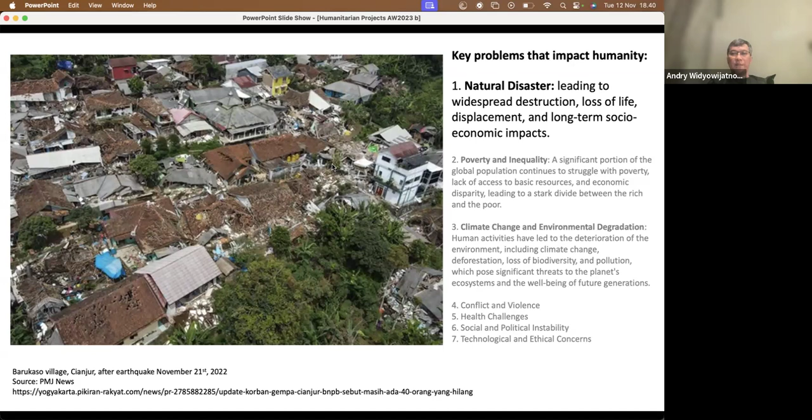There are seven key problems that impact humanity, but I would like to highlight only three of them, which relate to my professional or volunteering projects that I will present today. The second key problem that impacts humanity is poverty and inequality.

A significant portion of the global population continues to struggle with poverty, lack of access to basic resources, and economic disparity, leading to a stark divide between the rich and the poor. This picture shows how poverty compels residents to construct buildings that are not up to standard, such as non-confined masonry, which is vulnerable to earthquake hazard as seen in Cianjur.

This is one of the buildings that I've seen in Cianjur collapse because of the earthquake, which was not a very big earthquake. A 5.6 is considered not a very heavy earthquake. But the massive destruction in Cianjur was because of poverty on one side, and people tend to build out of masonry construction, despite it not being up to the standard for earthquakes.

Another key problem that impacts humanity is climate change and environmental degradation. Human activities have led to the deterioration of the environment, including climate change, deforestation, loss of biodiversity, and pollution, which pose significant threats to the planet's ecosystem and the well-being of future generations.

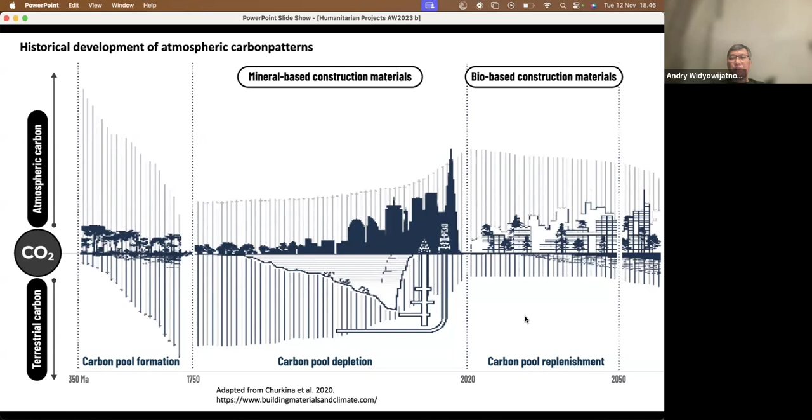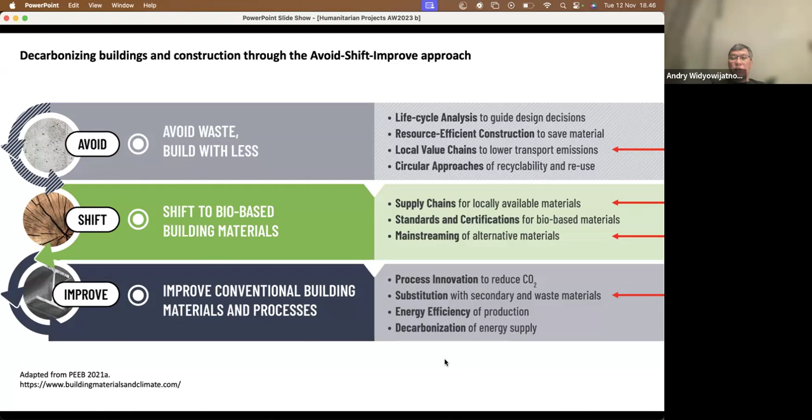Now I would like to go into the second section, which is about bamboo and timber. Recent advances in timber building materials technology offer the potential to replace carbon-intensive steel and concrete structures in some urban areas with mass timber. This provides the double benefit of reduced production emission and long-term carbon storage in the building compared to mineral-based materials. Substituting conventional materials with mass timber could reduce global emission 14 to 31%.

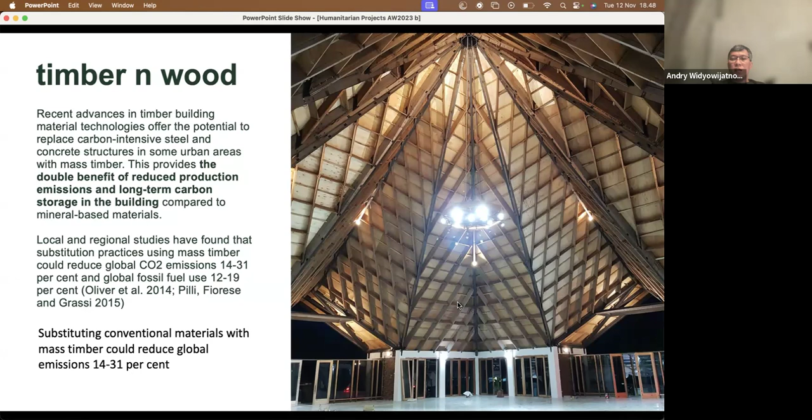This is a very huge impact if we can do this for our environment. We can improve our environment a lot if we use mass timber as a replacement for high-emission materials like steel and concrete.

And on the other side, bamboo is considered to be the front runner for driving afforestation practice to mitigate climate change. Global studies of the annual carbon sequestration capacities of bamboo range from 5 to 24 tons of carbon per hectare on the lower end. This is 1.46 times the sequestration capacity of forest and 1.33 times that of tropical rainforest.

And unlike the carbon sequestration losses associated with timber logging, selective bamboo harvesting may be less ecologically damaging to the forest, and productive species can yield between 150 to 296 tons per hectare of forest plantation land.

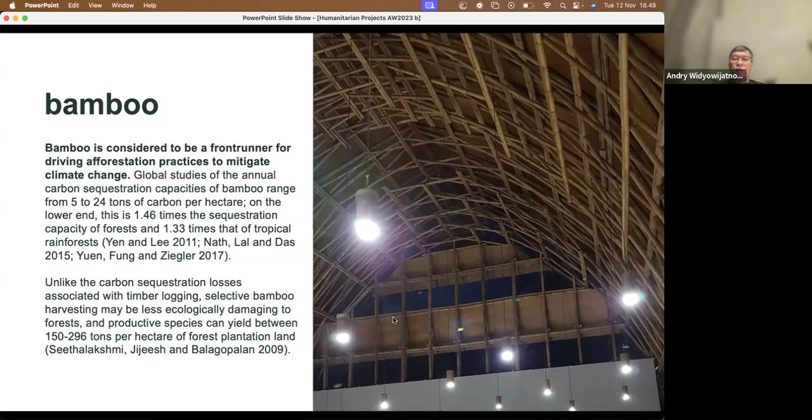And this is how we need to change the way we think of steel and also concrete. So if we can do it with bamboo, then it would be a lot of impact to our environment.

So in section 3, I would like to go on with the architecture for humanity, which I divided into some structures that I've built after the earthquake. So first is the temporary shelter and the mosque. As architects, we need also to think about the very unfortunate people, for example, those affected by the earthquake.

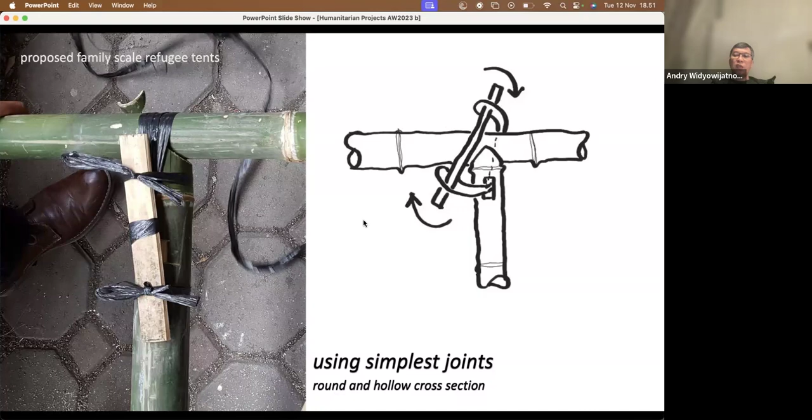And prior to going to Lombok after the earthquake in 2018, my students and I conducted a workshop in our university, and we made the prototype of this temporary family shelter. So we use 11 pieces of bamboo with the same length, and then we use a kind of reciprocal frame configuration. This is widely known as the Da Vinci bridge configuration.

And after we make this kind of connection, everything can be done on the ground. It's very easy. Then we lift this up and push this one inward, and the next step is we have an A-frame like this, and then we tighten the crossing like this with the ropes. And then after that, we can cover this one with the tarpaulin.

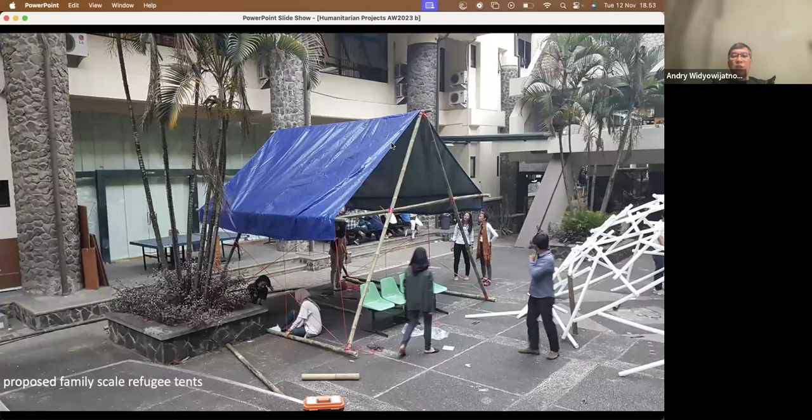So this is the process that we did with our students in the backyard of the campus, and we covered it with the available tarpaulin at that time. I would like to show you how the structure is very light. It can be lifted with only four men. Later on, you will see how easy this is to be lifted and moved to other places wherever it is needed. So it is quite strong enough also. Not very strong, but strong enough as a refugee shelter.

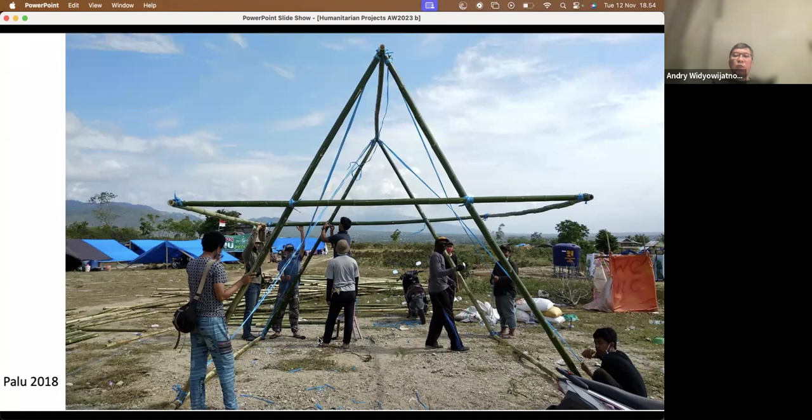And after the workshop, I sent my students to Palu, because previously Lombok was hit by the earthquake, and after a couple of months, the earthquake hit Palu, and the casualties were also very big there. So I sent the students to Palu to build this, to try to educate the people and to offer a more comfortable family shelter for the refugees. And this is the example.

And I've built this structure in Lombok also. I didn't use the common tarpaulin; I already made the measurements prior to building it, so it will fit with the A-frame. I even stayed in this shelter for 2 or 3 nights in Lombok. It doesn't provide the best comfort, but of course it's more comfortable compared to the shelters built by the people in Lombok by themselves.

So after the earthquake, which happened in late 2022, we built many bamboo shelters for the people there, because the need is very, very huge. And we were very lucky to be helped by the military.

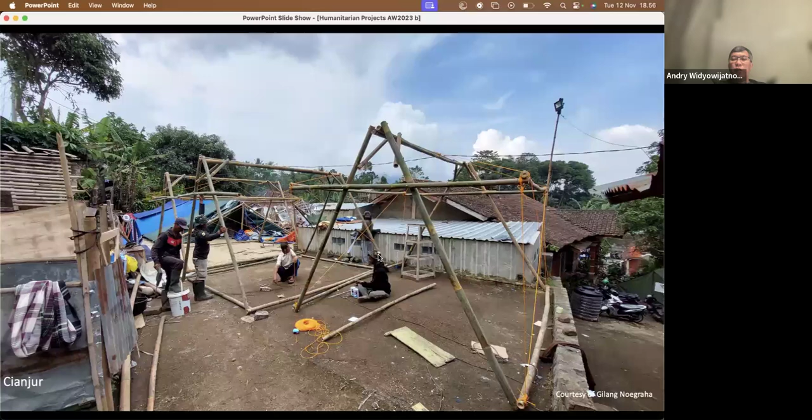Yeah, military. We teach them how to build the A-frame shelter, using a very simple connection like this. And then because of the discipline of the military, they can build in many places. The replication is very, very heavy there.

So we built in a certain location as a workshop for building this shelter, and after we finish, we move it to wherever it is needed. So you can see that this can be lifted with only four people after it's finished. You see here we built this differently from the previous one you saw in Lombok.

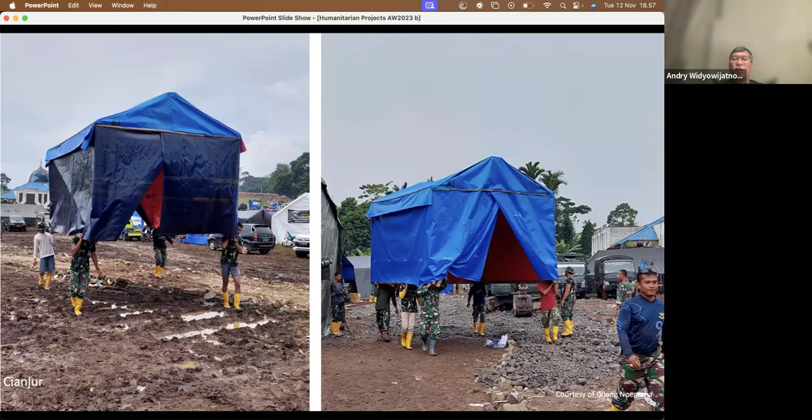In here we use the available tarpaulin, in which one tarpaulin is used to cover the wall, and the other tarpaulins are used for roofing. So basically, this is used without pre-cut tarpaulins, just using the available tarpaulin that is already in the place.

And in here you also don't see the ventilation. Later on, I will show you our development to make the ventilation in this tent. But you can see here we built in many places, and then we sent them to the people in need. And this is the compound of the refugees using our tent.

We work with the NGO there, called Rumah Amal Salman, and we built more than 140 small shelters, 3 to 4 square meters, with a height of 2.6 meters. And we even built 3 big shelters, 5 to 5.7 meters, with a height of 4 meters. This was needed mostly to replace the temporary mosque in Cianjur.

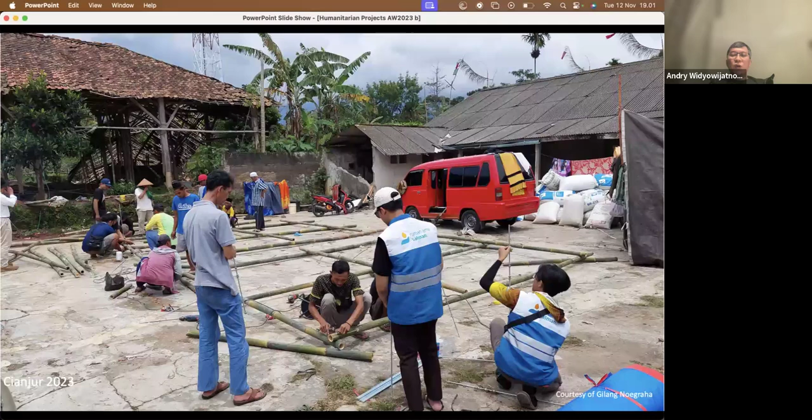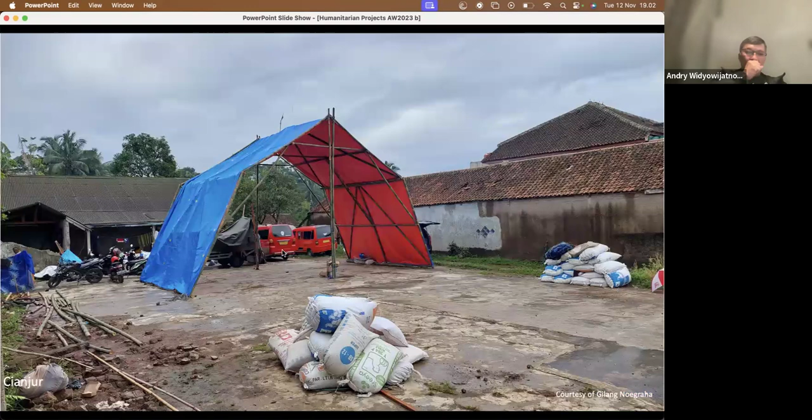So not only the small family shelters, we also built big shelters for the mosque, the general kitchen, classes, and other purposes. This is the example of the big shelter that we built in Cianjur.

We can solve the problem with the span. We can solve the problem with rigidity against the earthquake. But the problem with a big structure like this is the wind. Because it's very light and basically closed, it's really easy to be blown away by the wind. Therefore, we need to reduce the height of the building.

So in the end, we needed to cut and reduce the height. So we built a much smaller shelter. However, it's still big enough for the community to stay there after the earthquake.

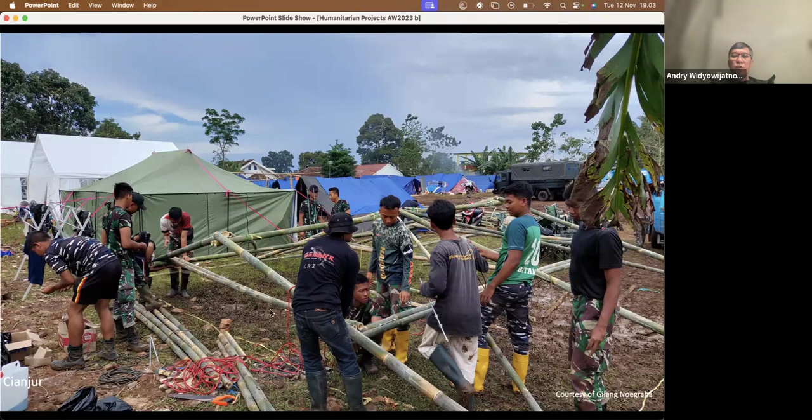And this is another example also in Cianjur, with the help of the army. We built many big shelters, and because of learning from previous experience, which was quite easy to be blown away by the wind, we need to use more reliable joinery in this case. So we use threaded rods or bolted joints for this construction.

Although we also make it very simple, everything is done prefabricated, and after that we teach them how to connect these two together, so we can build the mosque in here. So this is basically quite a big space for the mosque, because the mosque also collapsed because of the earthquake.

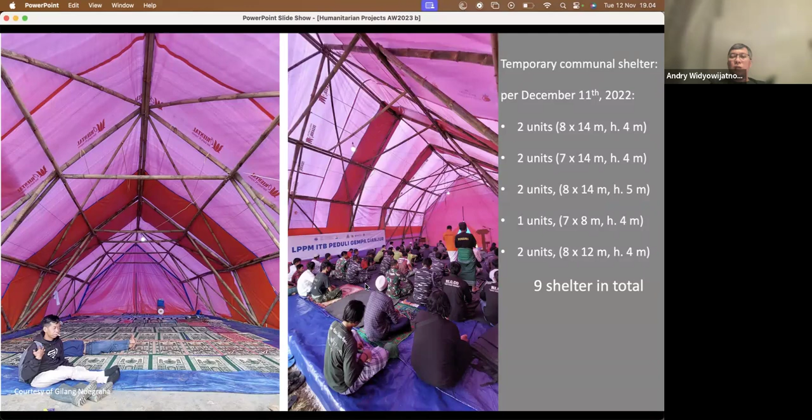So this is after the Friday praying in the mosque. So up to 11th of December 2022, we built nine big communal shelters like this in total, with a very big span, like 8 to 14 meters, with the height of 4 meters. So this is the things that we can reach, we can build in there.

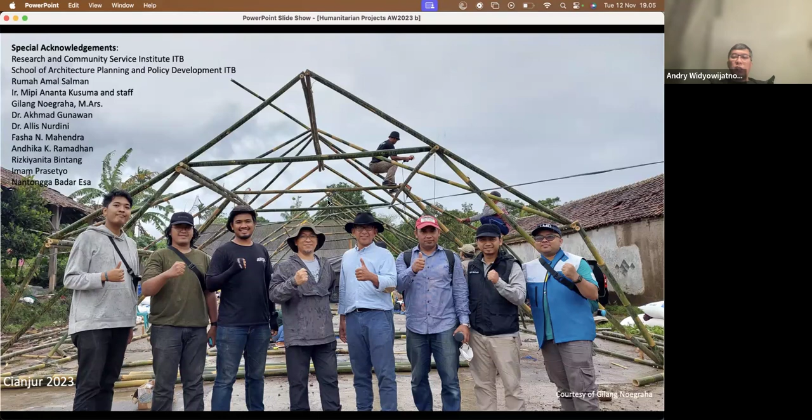So this is actually work of many stakeholders, and some of them are also my students in ITB. And going back again, from the earthquake in 2018 in Lombok, this is probably the prototype of the smaller scale of community shelter.

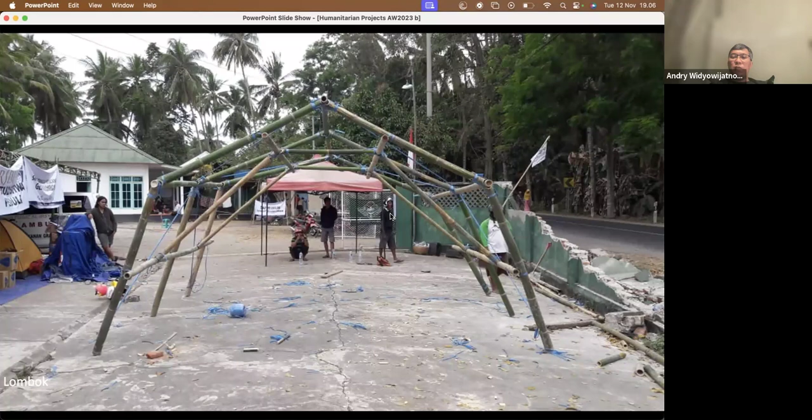With the help of my student at that time, Gilang Noegraha, I sent him to Lombok, and then he built the shelter in Lombok with the community, teach them how to build it, so they know how to build it with the simplest connection that I've already taught to Gilang before. And yeah, this is one of the shelters that has been built in Lombok.

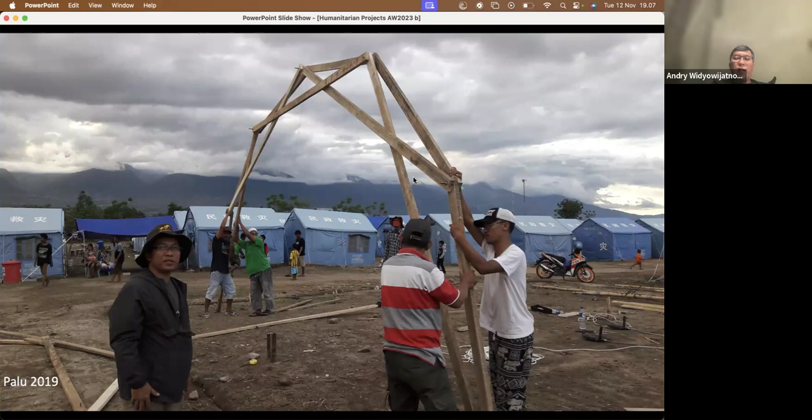And it's really useful actually. But the problem is the very big winds, because it's flat and exposed, and there is no big tree in the surrounding area, so it really had a problem with the big wind, and the quality of the bamboo is also not very good, and it collapsed because of the wind. And then I needed to rebuild again.

You see that this is another refugee shelter. People rarely stay inside the shelter during the day because it's very, very hot. They prefer to stay inside the big shelter that we built with the bamboo. However, it collapsed because of the wind, and also the kids were climbing the structure.

So we needed to build a more sturdy structure, and we changed it into timber construction, since timber is much easier to find in Palu with a better quality. So we changed the idea from bamboo into timber, and this is the frame that we built. Everything was done on the ground, and after we finished the frame, we erected the frames one by one. I even needed to help them to make sure that the structure is stiff enough.

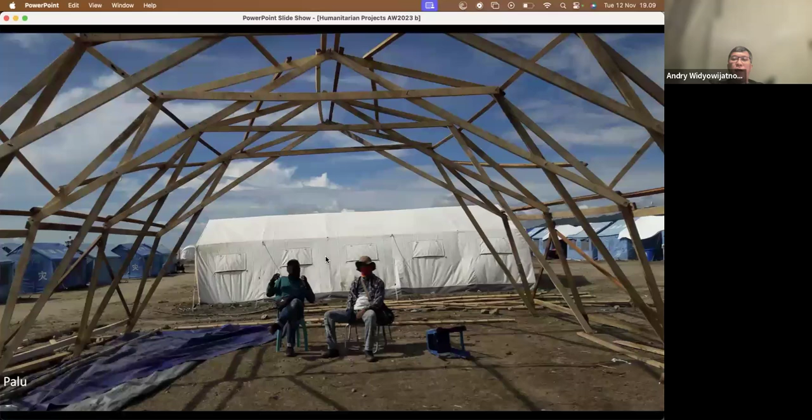And this also became the biggest structure in Petobo at that time. You can compare this one with another tent here. Afterward we covered this one with tarpaulin.

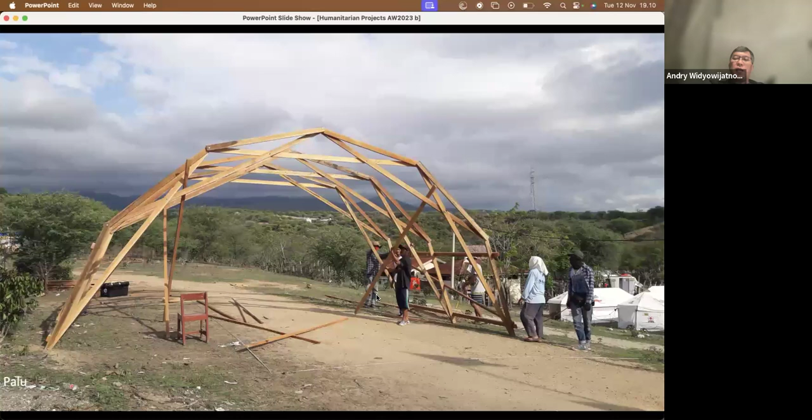And after we finished the first shelter, I left four of my students to build another in Palu, but in a different refugee area. So they know how to build it, with the help of two more workers in Palu. They built the second structure, and they could finish from the start in less than 5 hours. So in less than 5 hours, they already reached this kind of structure.

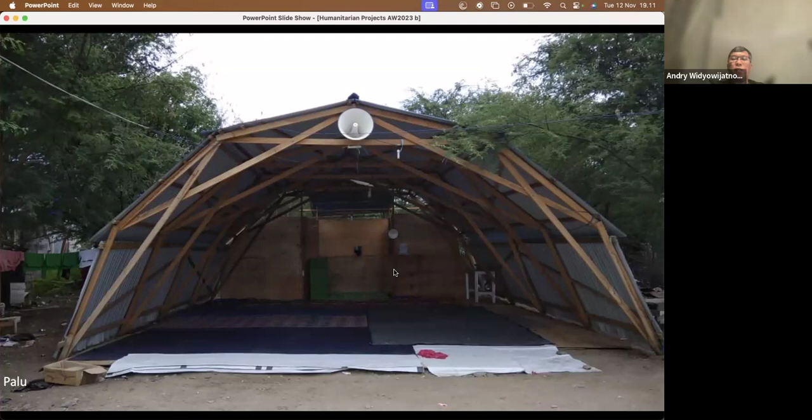And in this case, we covered this one with corrugated metal sheet because we expected a longer lifespan of the structure for the people to use this building. So this is very important. Medical treatment also happened inside the structure. And then it was moved to other places and became the temporary mosque there.

So it's really useful for the people because at the time it was also the biggest structure in the area that could be used. So there are many programs happening in this building.

And then after Lombok, Palu, the earthquake happened also in Mamuju, during COVID. So at that time I couldn't travel because everybody was locked down in the house.

Mamuju is about 9 hours from Palu. I still have volunteers that previously helped my students build this frame shelter, and I asked them to help me build four of the shelters in Mamuju. They agreed to do that, and everything was prepared in Palu.

They pre-cut the timber in Palu, and after that they transported the timber to Mamuju and erected it there. They built it in four places in Mamuju.

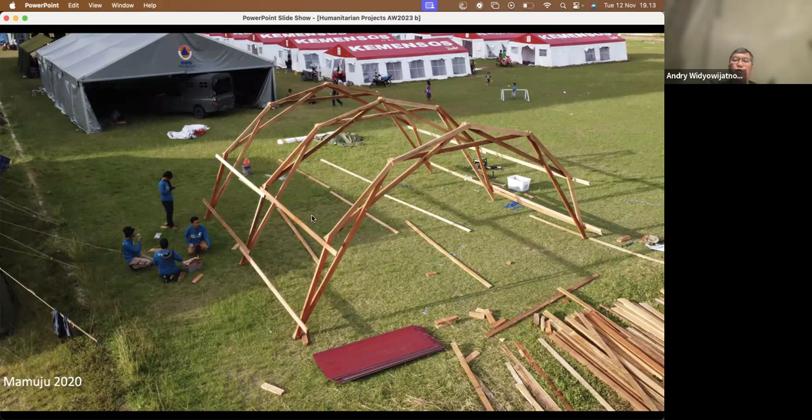After the reconstruction was finished, this was used as a kindergarten in Tapalang in Mamuju. So what was previously intended to be a non-permanent structure became a permanent structure. And this is another shelter which was built in Mamuju in 2020 by our volunteers at that time.

Using the same principles, after the earthquake in Cianjur, one of the health centers in Cianjur was damaged quite severely. So we needed to build a temporary community health center, or puskesmas as we call it. And we built it with the same principles.

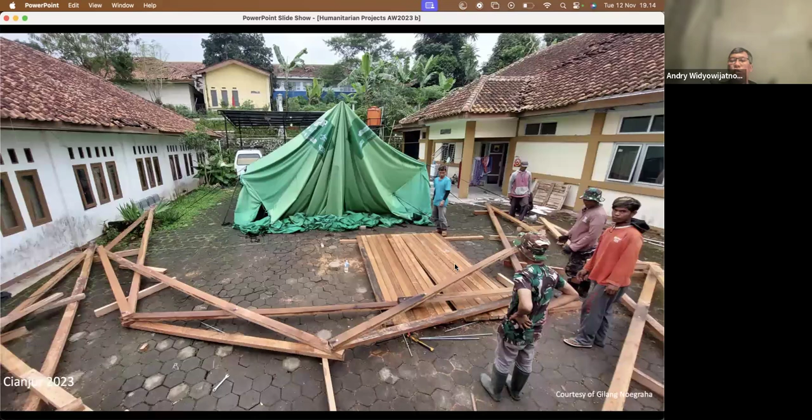We used timber, and we needed to build on this very narrow site. Using the same principle, though it's quite big, we could manage. Then we built the new Puskesmas here, and it has been used to replace the previous one. And I think one of the kids was born here during that time.

So this was the cooperation between Rumah Amal Salman Research and Community Service Institute in ITB and our School of Architecture, Planning and Policy Development. Some of my ex-students and also my students helped to build this one.

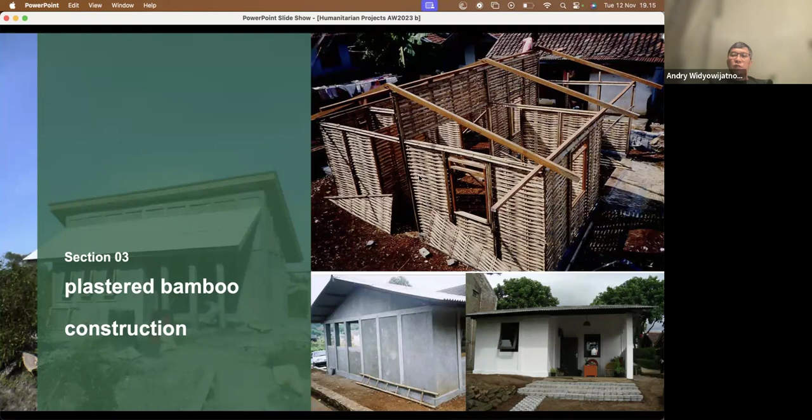Okay, then we move to the next section, where I would like to show you plastered bamboo construction. This is also one of the technologies intended to be used after earthquakes. So why plastered bamboo construction? Because almost no one in Indonesia wants to live in a bamboo house anymore. The problem is the image of the building, which is considered non-permanent.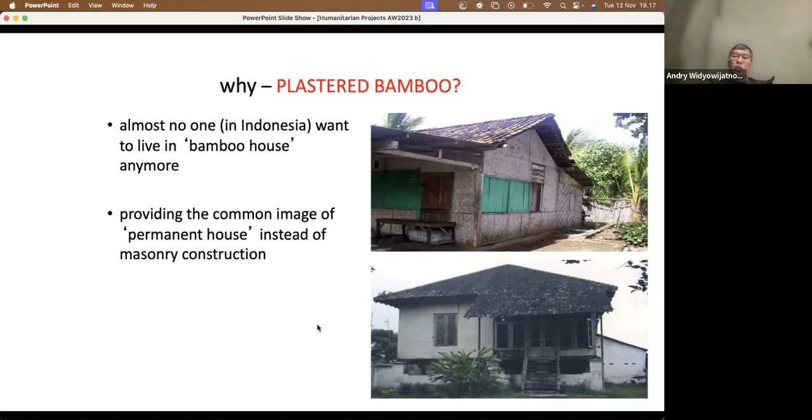The building looks like a masonry construction. However, it's actually made of a timber skeleton covered by woven bamboo and then plastered on the outside. So plastered bamboo construction is basically trying to provide the common image of a permanent house, but using bamboo and not using masonry or brick.

Another reason is we can use low quality bamboo, because in the end we can hide it. This is also an alternative bamboo preservation technique, protecting against rain and moisture and preventing the entry of fungi and beetles. Plastered bamboo construction also improves fire resistance and controls the interior thermal conditions.

In some cases that's very important, although most of the time, especially in tropical countries, it's probably better to have the same thermal condition between the outside and the inside, because in some places the outside is not very hot. The idea of plastered bamboo construction is also to provide housing while reducing waste.

With the common conventional method, after an earthquake there were refugees, and people tend to build emergency shelters, which become waste when they build the new house. Using plastered bamboo construction, we can make prefabricated bamboo panels, which can be used as bamboo emergency shelters in a safe location in the refugee area.

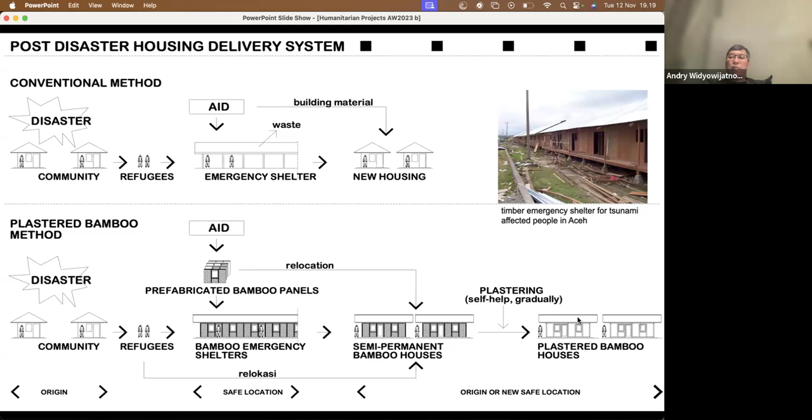Then after relocation, we can build a semi-permanent bamboo house using the same bamboo panels. And after plastering, it becomes a plastered bamboo house, which can be considered a permanent house. So the idea is making the prefabrication like this, then plastering, and then we have the common image of a permanent house.

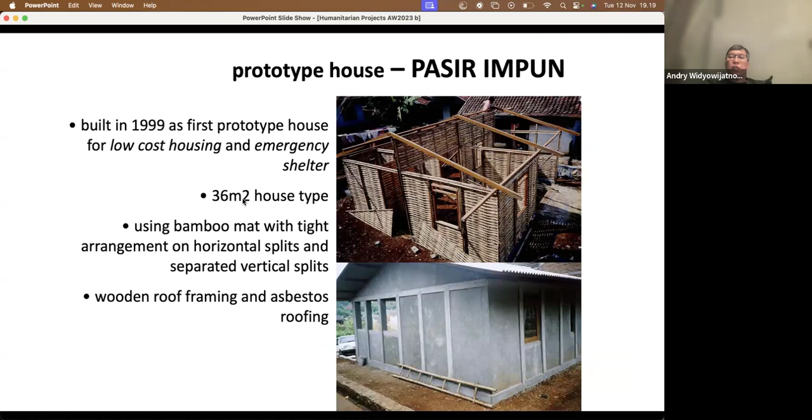This is the first prototype, built in 1999. Everything was done outside the site and then erected here. After that we did the plastering to have this 36 square meter permanent house. Everything was done here in the workshop.

Actually, the workshop has been done more than 300 kilometers away from the site, because at that time, because of many factors, it was built in Purworejo, in my hometown, including the wall frame and etc.

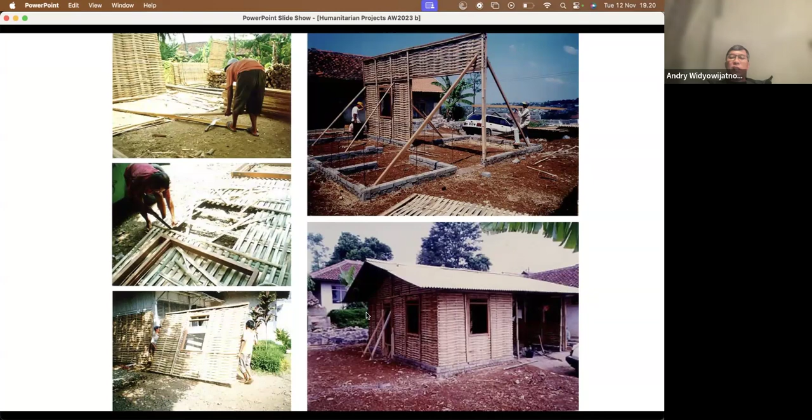And then I brought all of the modules to the site, and we erected them here in a day, so we can have like a day to erect all of the structure here, because using only very simple joinery, lacing joinery. And then it takes quite some time, probably a month, to plaster this one, because plastering is also new for the workers, so they need to learn first before they can do it fast. Yeah, so in the end, we have like

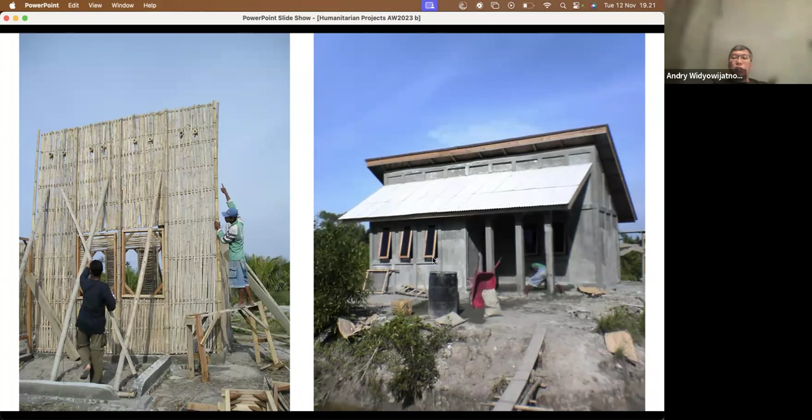construction. So this is another project. Oh yeah, this building is 1999, and up to date, the building is still there. So it's already like 25 years old. And this has been built in 2005. Yeah, it's 2005, and maybe last year, a student of mine took a look at this building, and it's still there. So already like 20 years old.

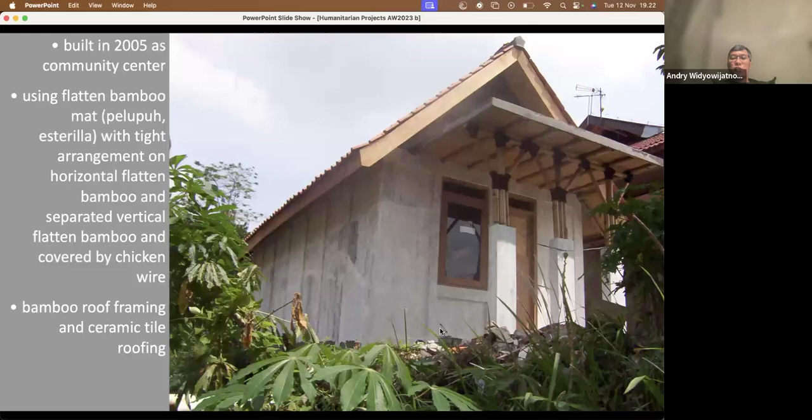However, it was demolished. Yeah, it was demolished because there was a project happening in this area. This is the last picture that I've shown. I use a different type of walling system. So in here, I use the flattened bamboo as a wall. And then I need to put the chicken wire to improve the quality, and also to improve the speed of the plastering process.

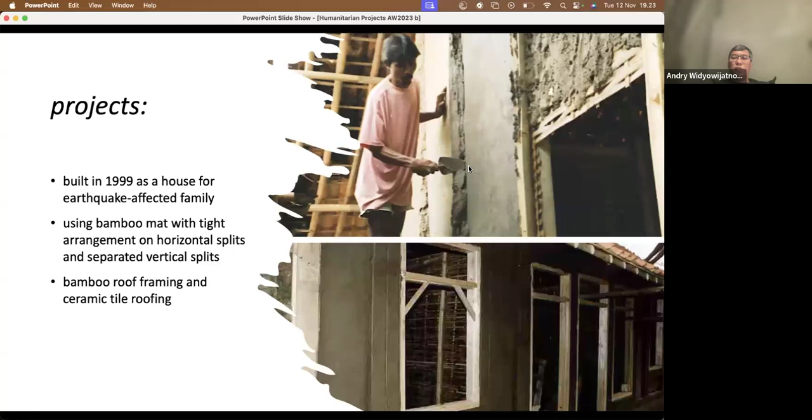Yeah, this is another project. It's also one of the first projects, built at the same time in 1999. This was built after the earthquake in Sukabumi, and my students collected the money from the donors, and then they built the house there. And in 2019, my student came back and saw the building is still there. So it's already like 20 years old, and it's still in good condition.

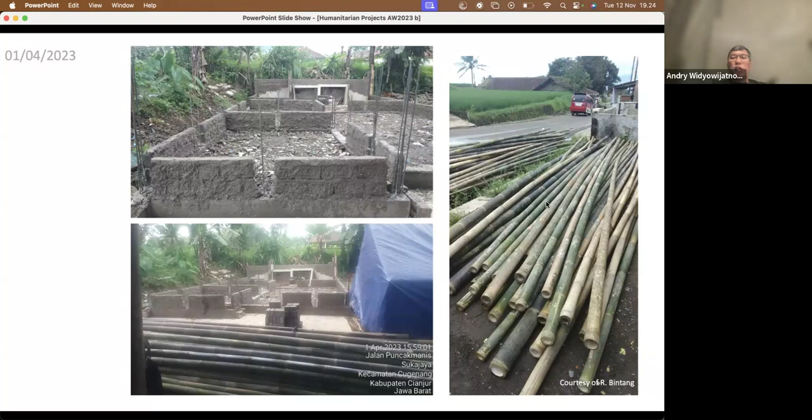And recently I built the new structure with my master students. And since the site is very small, it's very difficult to make a kind of prefabricated structure. Because it's going to be difficult to distribute the modules, distributing bamboo poles is much easier compared to the bamboo panels. So we built actually on site. We built all of the modules on site, and then we erected them one by one

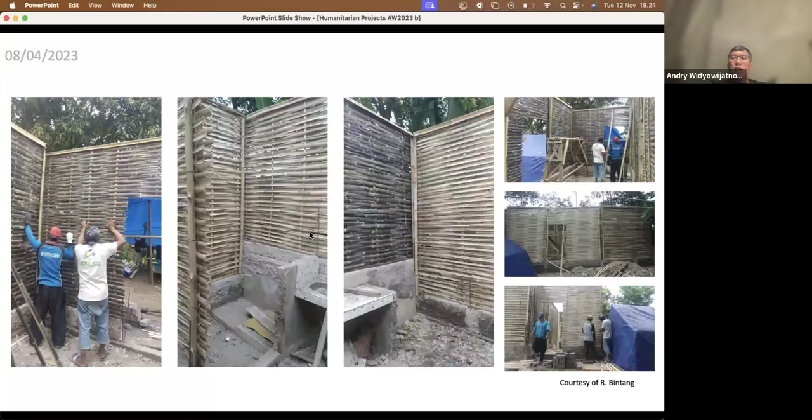like this. Yeah, and we use some black bamboo, because black bamboo has quite exotic skins. And with this black bamboo, we only plastered one side, and we expose the other side. So it will provide a very nice texture on the outside. So you can see this is after the finish of the structure.

You see that some of the walls we did not plaster. We want to keep it like this to show that actually the wall is not made out of brick, but the wall is actually made out of this woven bamboo. So yeah, this is the owner of the building, and this is my student. This is also a friend of mine that helped me to build this building.

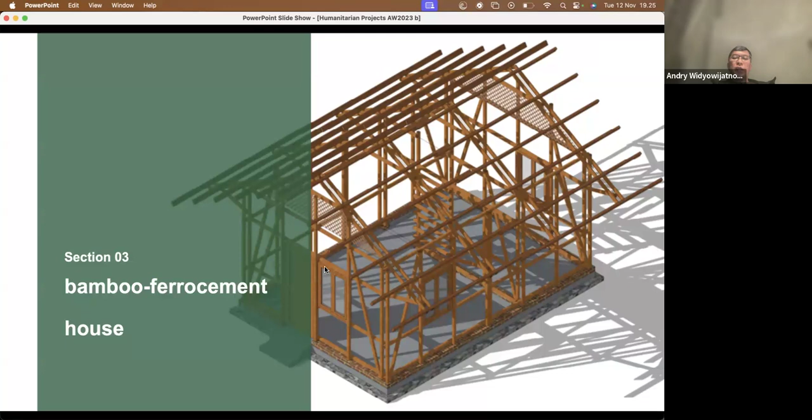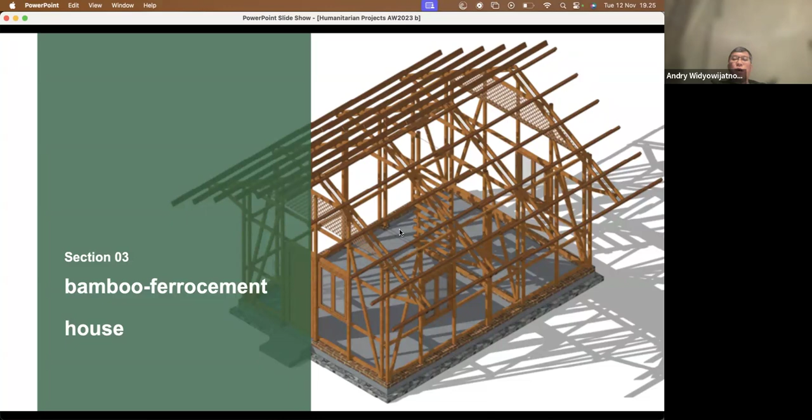And another structure that I've built for post-disaster reconstruction is this combination between bamboo and ferrocement. Ferrocement was widely used a very long time ago, but it's never been used recently. But I've seen that it can be combined together to make this, I call it a rumah bambu ferrocement, or bamboo ferrocement house. So the idea is very simple.

I have bamboo crossing each other, and put in the middle this chicken wire. I use the bolted joint to connect, and I make everything almost the same like this as wall modules, using a bolted joint and then connecting everything like this. Even you see that I have a door here, but the door is not open yet, so I let the bamboo go on.

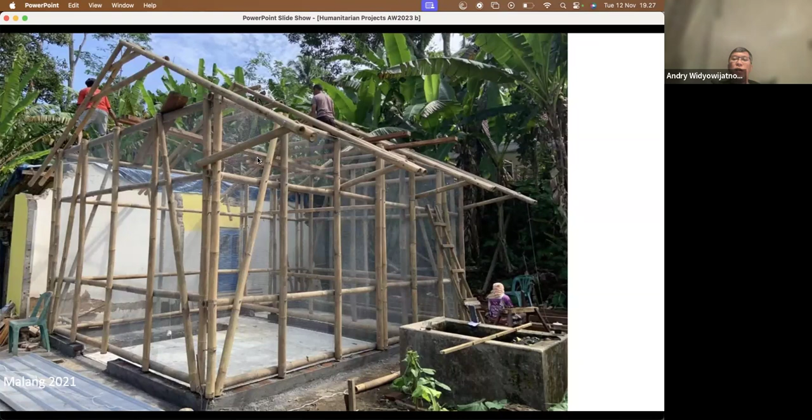This is important for transporting, and you see that the modules are like 1 meter each, like 4 meters by 3 meters, and another is 3 meters by 3 meters. So we're transporting everything like this, and then sending. Actually, it happened in East Java, and I made this one because I need to teach also the workers. I need to teach also my students how to do this. So everything has been done in Bandung.

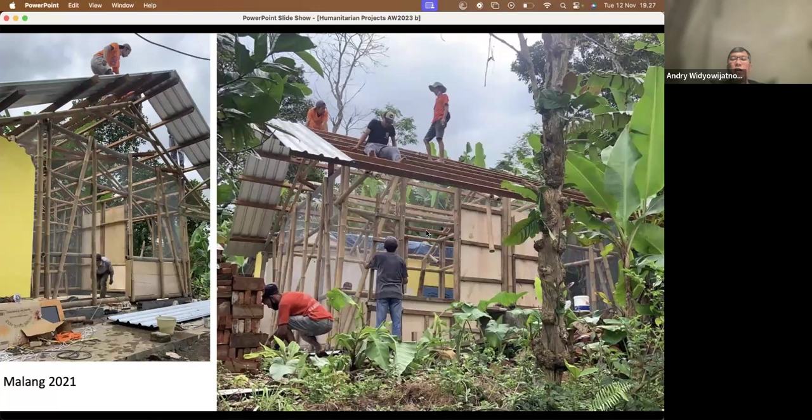So it's like maybe 400 kilometers away from the site of the workshop. So it's far away, but yeah, I see this one is the best way because of many considerations. And then the good thing is the people there are also very happy to help build this one. Although this is very new for them, they want to help one of their members in the village. So after that, we can finish the building here, and this is the owner of the building.

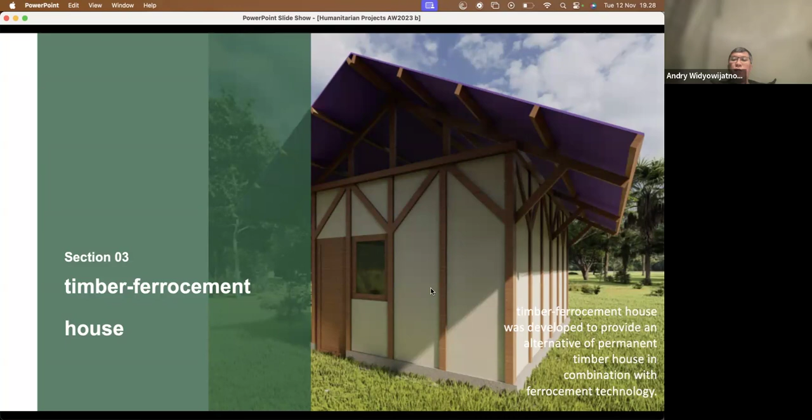She's very happy that we built her her new house. And then quite similar, but in different types of materiality, I built timber and ferrocement. The idea is the same, combining timber and also ferrocement, and in the middle, between the crossing timber, is this chicken wire. Yeah, and nailing.

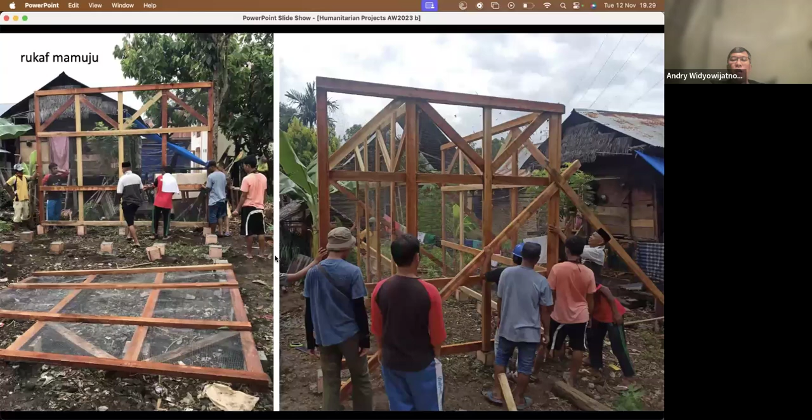Everything has been done very simple and very easy. And prior to erecting this one, we built the foundation, the simple foundation, and then we sent this one, and then we built it. We discussed also with the person who will use this building, and then with the help of the people there, we simply erected this kind of structure.

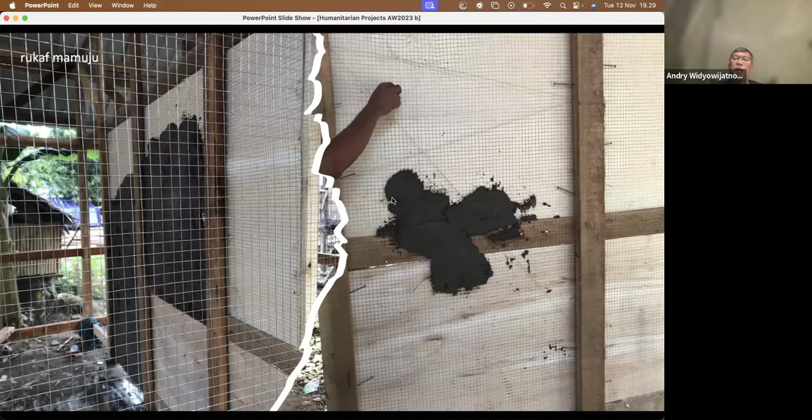And then after that, the building was erected. The frame is very simple and very easy, but then the problem or the challenge is how to apply the ferrocement. Yeah, because it means that we need to plaster this chicken wire. So it's a lot of work to do, but in the end they can manage to build it.

You can see that in one side we only see timber in one direction, and in the other side we see timber also in the other direction. So this is the way it works. You can see this is the final result of the building. And this is another community center in Cianjur after the earthquake.

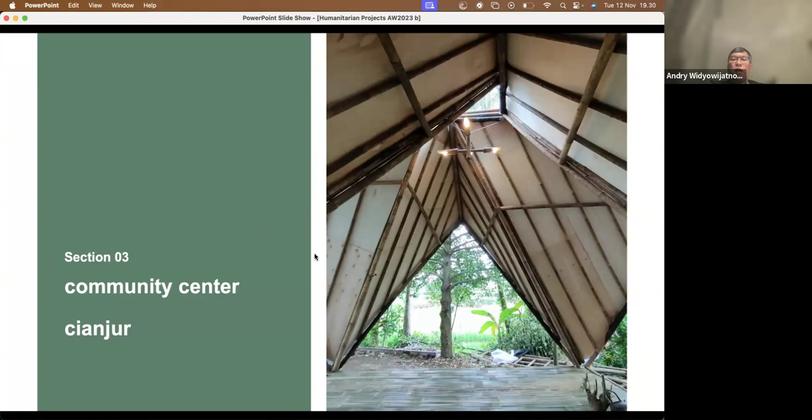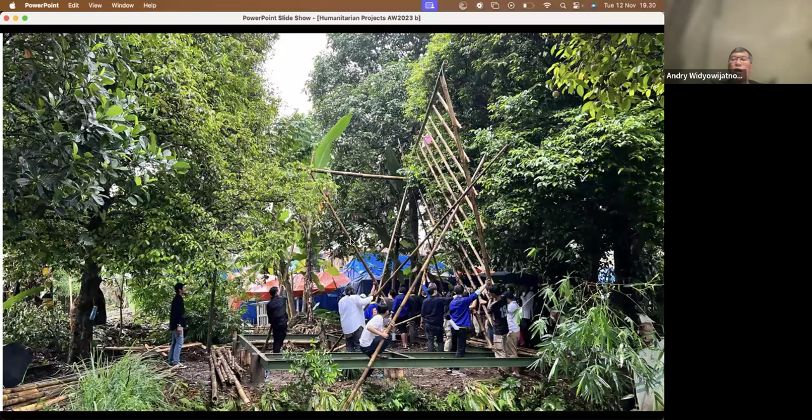I also have worked with students, and we collaborated with the University of Florida, ITB and University of Florida, made a workshop together, and we built this kind of gazebo for community shelter, because they don't have any open space. They don't have any building that is big enough for them to conduct like a program or anything. So we decided to build it in here.

First, the students need to work, and then after that we make a kind of jury, and then we choose one to be built, and this is the final result of the building.

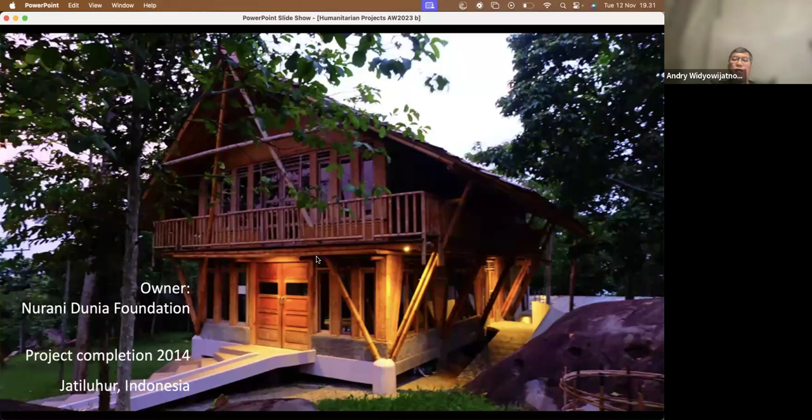This is another project of mine, community healthcare in Jatiluhur, using the planar frame. The owner is Nurani Dunia Foundation, and basically we also try to promote the use of bamboo in that area, because actually Jatiluhur has a lot of bamboo, but most of the buildings there have been built using masonry construction. So this is the structure that has been built.

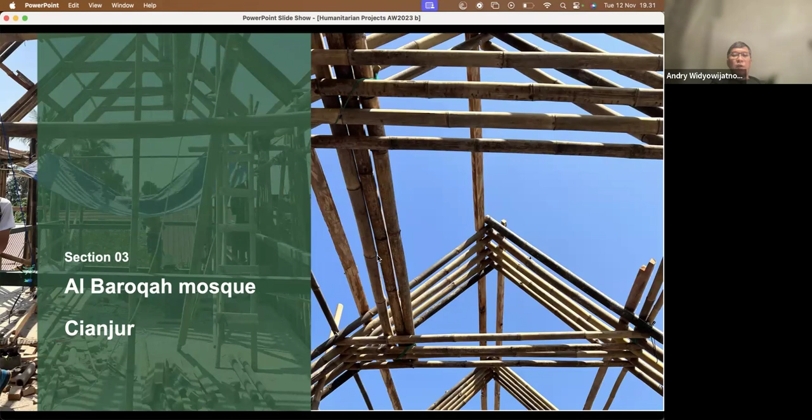This is another project after the earthquake in Cianjur. I've built a shelter, but then I've built two permanent structures. One of them is Al Baroqah Mosque in Cianjur. Yeah, this is not finished yet at that time, but actually it's already finished. But I haven't updated this presentation yet.

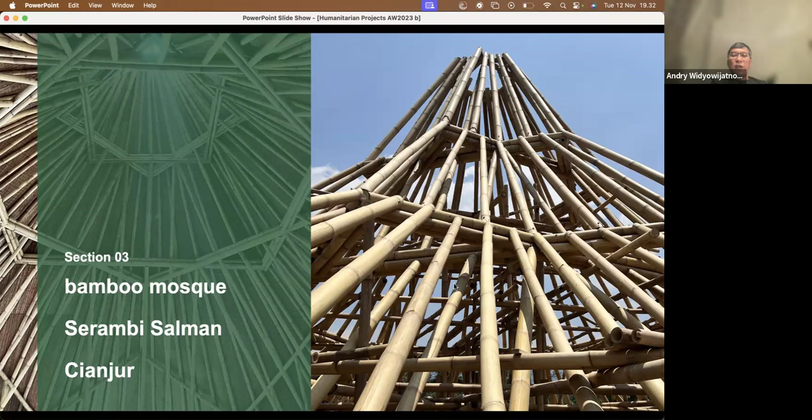And the other is the mosque also in Cianjur, Serambi Salman Cianjur. The previous mosque collapsed because of the earthquake, and then I built the new one, and everything. Actually, the spiritual leader of the mosque is also very much eager to have a bamboo building in the area. So we are very happy to collaborate.

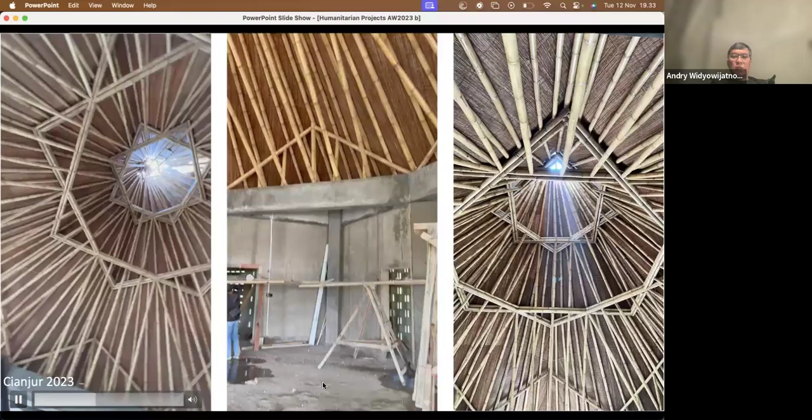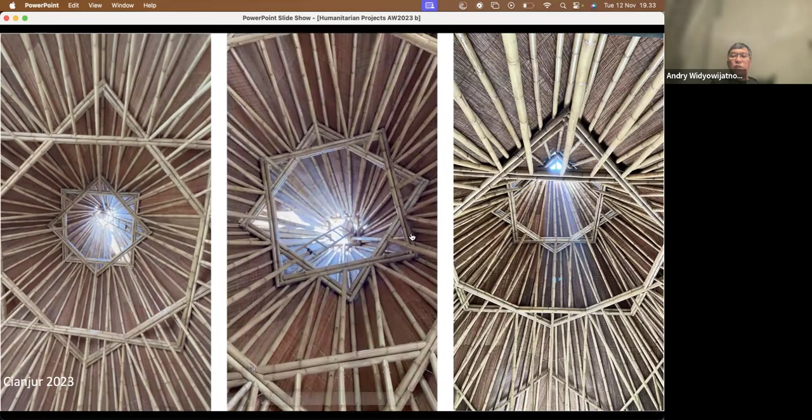Yeah, and this is the skeleton, made out of concrete, but the roof structure is made completely with bamboo. So this is the final result of the structure. You can see the complexity of this roof structure to reach the span of 30 meters. This is the building. Now it's already completed.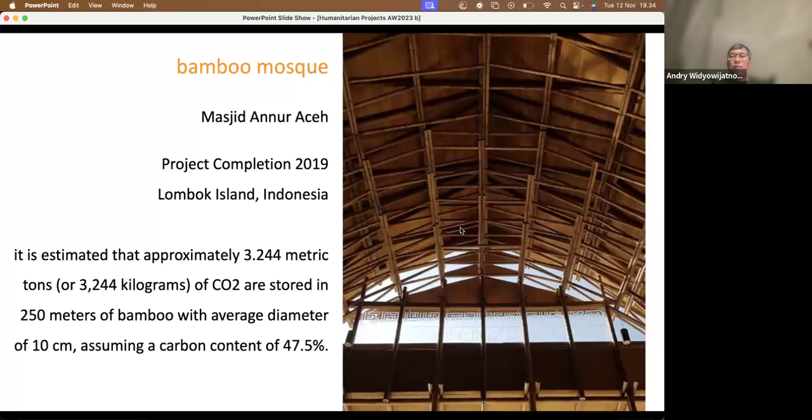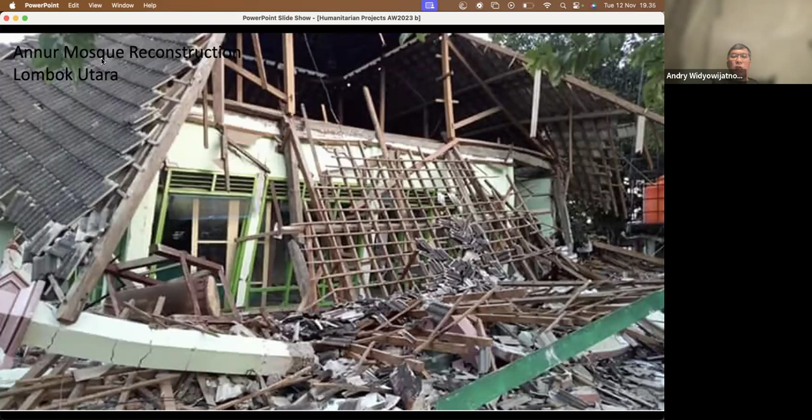So this also needs to be aware of. One of the reasons for using bamboo is absorbing the carbon dioxide inside the bamboo. So everything started because one of the mosques collapsed because of the earthquake, and this was the mosque, Annur Mosque, and then I tried to make a proposal on how to build this one with bamboo.

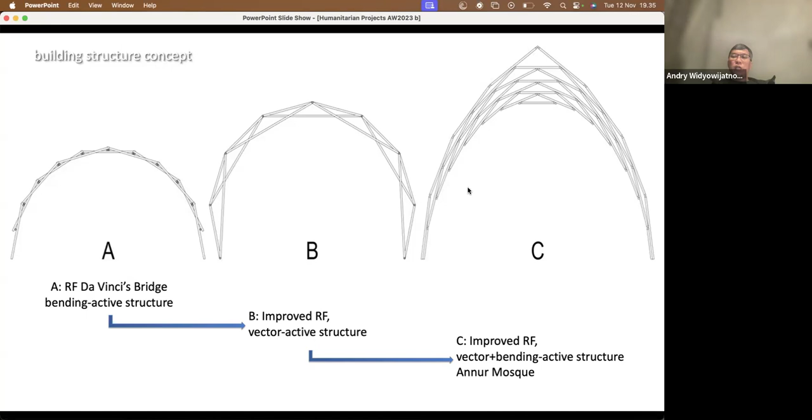And I've asked also my student at that time, Imam Prastyo, to help me make an image of the building, especially to have permission to build this one from the local community there, and also from the financial sponsor, which is the people and also the provincial government of Aceh.

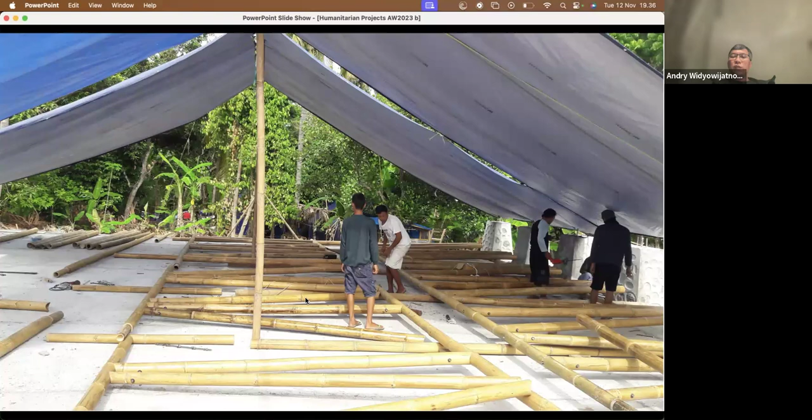And we also built the model. We make the model. Why? Because the model is needed to communicate with the worker, and then after that we build it in the real scale. So everything has been done like a semi-prefabricated.

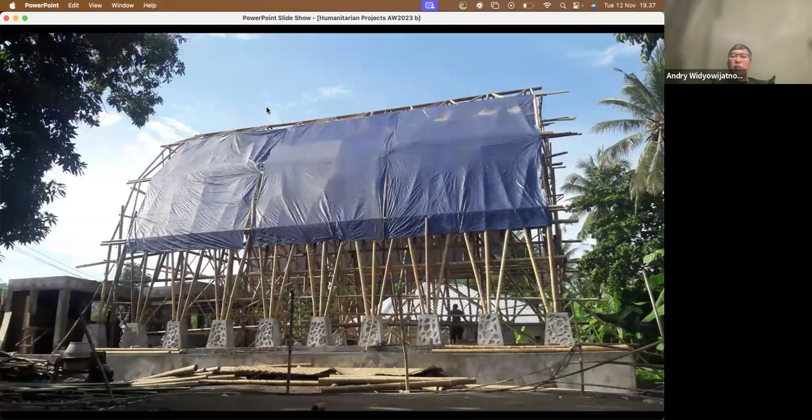Yeah, so we built modules one by one, and after we finish, we lift this one on top of the pedestal, and we make it layer by layer, and after we finish, we covered it with the tarpaulin to provide a more comfortable environment inside, because Lombok is very hot. And then, one by one, we finish the structure from the inside.

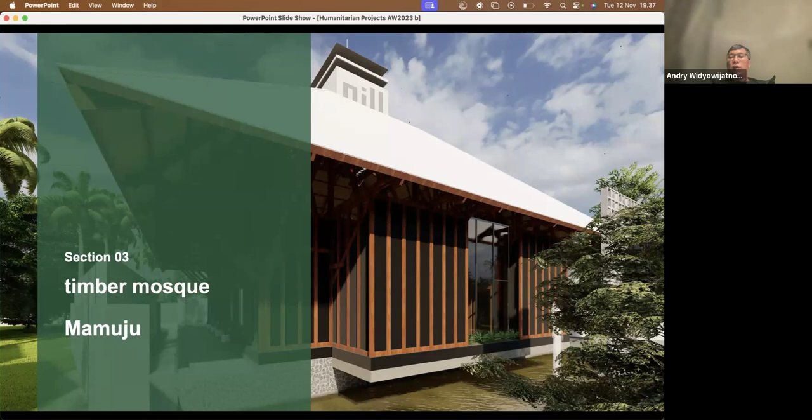And another is the timber mosque in Mamuju. Since Sulawesi has a huge potential of coconut timber, I made a proposal on designing the whole structure out of coconut timber, and I also try to estimate the carbon dioxide that has been stored in the building. So approximately 44 metric tons of carbon dioxide has been stored in these 24 cubic meters of coconut timber, assuming a carbon content of 50%.

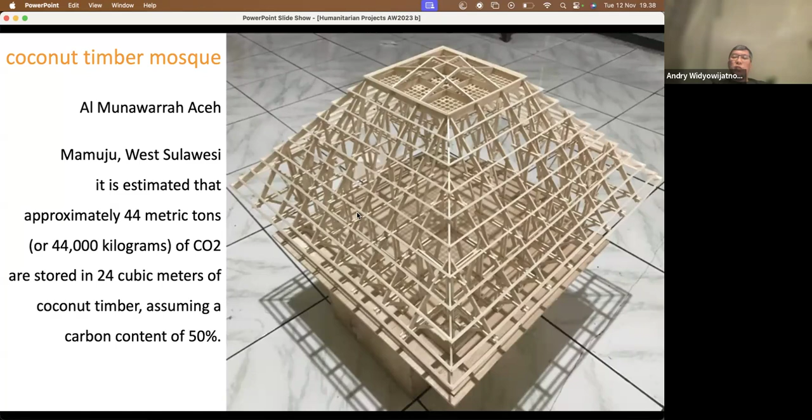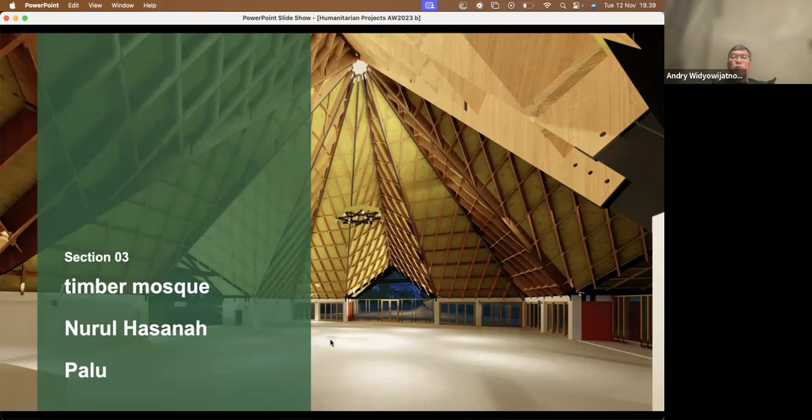And then the last, I would like to show you the timber mosque Nurul Hasanah in Palu. So this is probably the biggest timber structure in Indonesia. The completion of this building was in 2020 in Palu, Indonesia. It was estimated that 77 metric tons of carbon dioxide are stored in the 40 cubic meters of hardwood, assuming a carbon content of 52%.

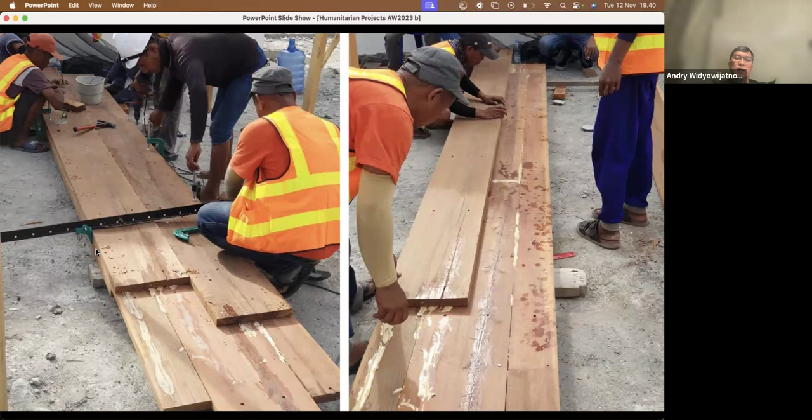I also try to introduce laminated timber, although in this case we laminated the hardwood, because since our structure is based on a lattice structure, in some places I need quite a big beam for the main structure. So in this case, I need a dimension of 6 centimeters of thickness and 60 centimeters of depth, or the height of the beam. So I'm combining the raw materials of 3 centimeters to 30 centimeters. This is the raw material that we have.

Then to provide that dimension of the beam, we need to make a kind of lamination. So we combine like this. We cut half of this and put 15, 30 to 15, and this is 30 to 30, and then we combine them using a lot of glue and also screws. And then we also use a kind of clamp to make sure that it will work together as a beam in the end. And the weight of this is almost 1 ton.

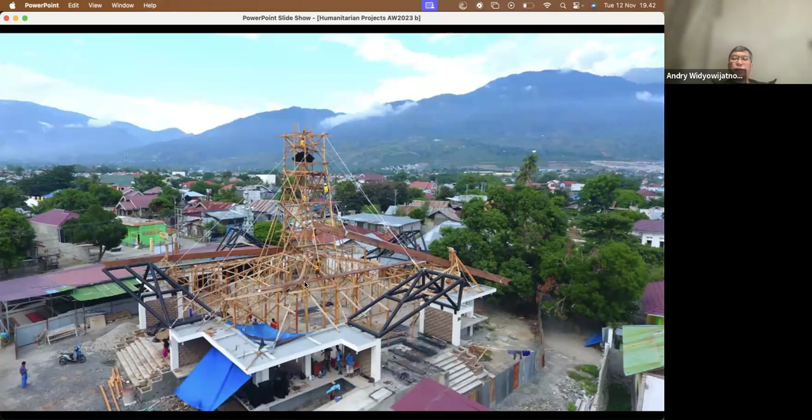And I'm very thankful for the workers here. They worked very, very hard, and they lifted this only with a tackle, without any mobile crane or other heavy equipment. Everything has been done manually. And it was also connected by this kind of joinery, steel plate joinery like this. And this is 60 to 6 centimeters. So we combine two layers of timber in this case.

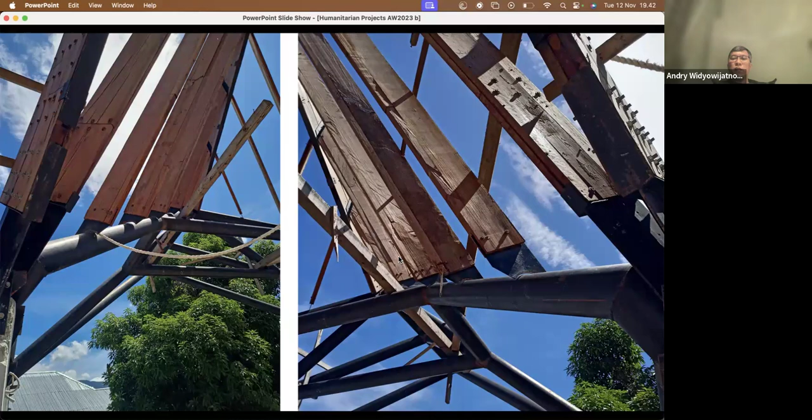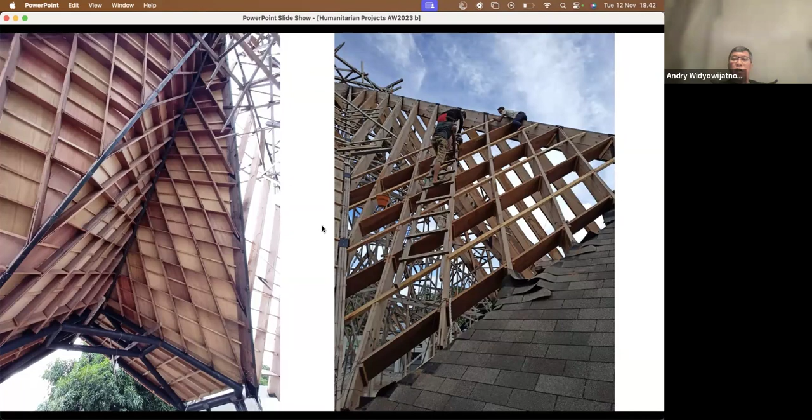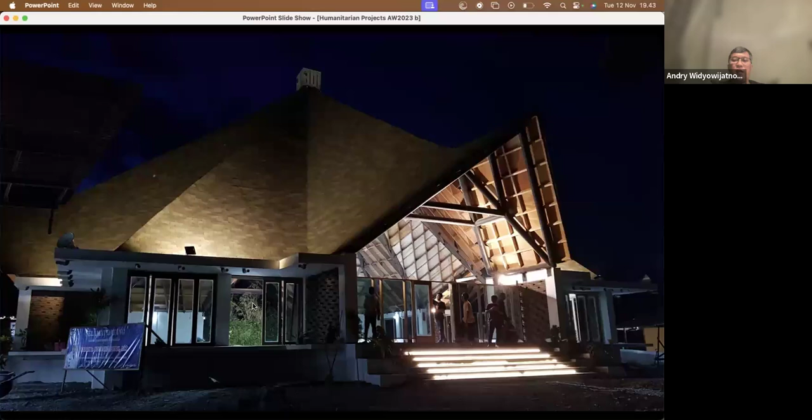In the end, you see this structure, and you can also see the scale of the structure in comparison with the people who work above. So you see how big the structure is, and this is the inside of the building right before the inauguration or the grand opening. After the inauguration, I was also invited to talk to the students from the local university there about the concept of the building. And this is the picture of the building inside, and this is from a bird's eye view.

And thank you very much for your attention. I hope my presentation can inspire you to work not only with conventional materials, but also to use bamboo and timber as your main construction. And also, I hope that some of you can work in a kind of volunteering project to help people, because we are very grateful that we live like this. We are very educated. Many people need our experience and expertise to help them with many ideas and with our creativity.